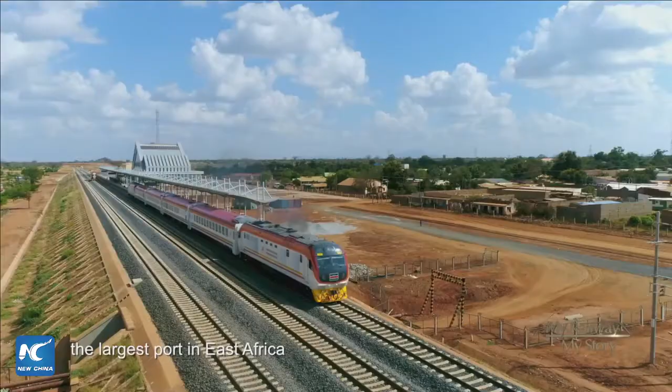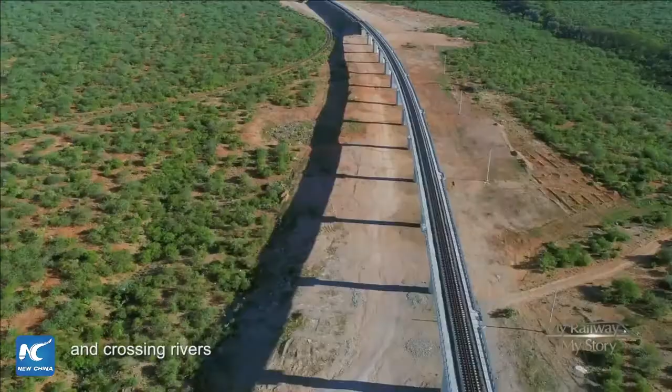This dream has been alive for over 100 years. The challenge of traversing mountain ranges and crossing rivers is above all a dialogue and communion between man and nature. Kenyan and Chinese railway workers tell the story of the Mombasa-Nairobi Railway line together in their own words.

I'm 27 years old. I'm a student at the Technical University of Kenya, studying civil engineering. Esther Wanjiku grew up in Nairobi, and her love for architecture and engineering began in her childhood. She chose engineering as her university major and did quite well.

As graduation draws near, Esther hopes to find a good job. It's very hard to find a job, and I think in our country we have so many graduates, and especially now being a lady, in an industry that is known to be male-dominated, it's not easy.

Esther finds it hard to secure an engineering job since such positions are few and far between in Kenya. The only railway currently in existence was built 100 years ago. The first railway in Kenya was built by the Indians together with the British. That's 100 years ago, and by then Nairobi was just a wetland. Not so many people used to reside here.

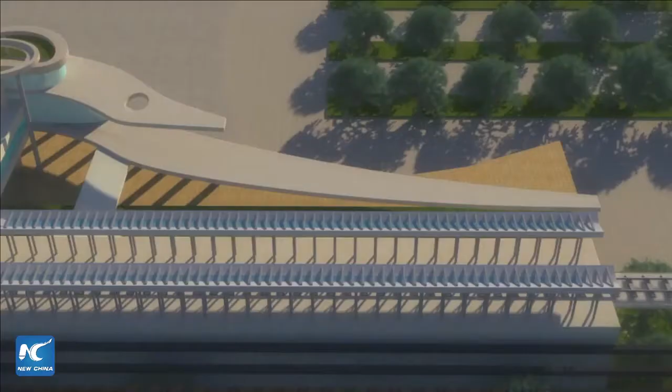In August 2009, Kenya Railways agreed to cooperate with the China Road and Bridge Corporation to construct the Mombasa-Nairobi Standard Gauge Railway. This new line will effectively reduce the travel time between Mombasa and Nairobi from 10 hours to about 4.

Moreover, the railway serves as the first section of the Northern Corridor Railway, upon which the imports and exports from countries like Kenya, Uganda, Rwanda, Burundi, DR Congo and South Sudan will be transported.

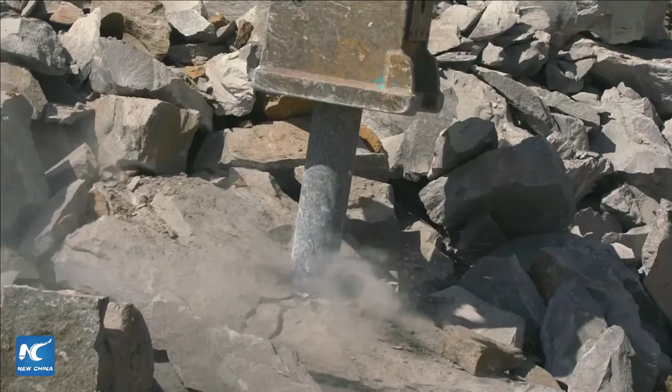In November 2014, the Mombasa-Nairobi Railway project officially broke ground, to take goods and services and passengers between Mombasa and Nairobi.

Everyone was talking about how the government is going to build a new railway that is going to be better and faster than the old railway, that it's going to bring a lot of change and a lot of development to our country and the neighboring countries. I got a job in the Standard Gauge Railway at Section 1 in Mombasa.

I will miss you, but I know you're going to work. All I want is that you keep God first, take care, be a good girl. I'll miss you. Bye, see you.

I know I'm going to miss my family, but I also know that I'm going to make new friends. I am very excited to be part of this great project.

This is Mombasa, the starting point of the railway, and where Esther is going to work. The company has assigned a supervisor for each new site engineer.

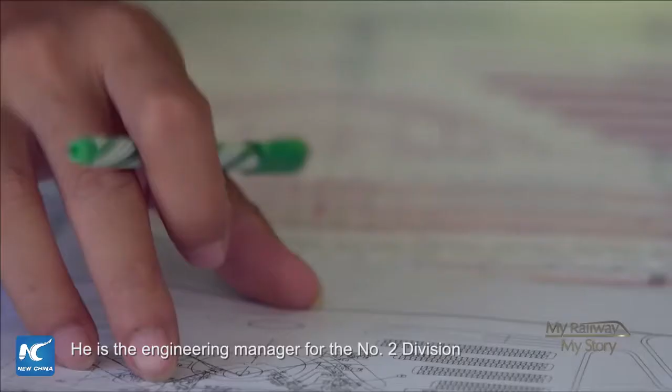31-year-old Ye Chungui comes from Guangxi Autonomous Region in southwest China. He's the engineering manager for the No. 2 Division, Section 1 Project Site Office of the Mombasa-Nairobi Standard Gauge Railway.

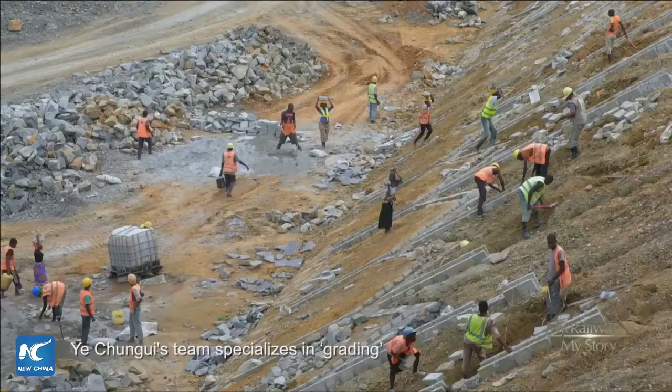Ye Chungui's team specializes in grading, leveling the ground, and within the coming 3 months must unearth and excavate nearly 1.4 million cubic meters of dirt.

Ye Chungui wants to train Esther as a site engineer, in charge of site equipment management, personnel deployment, and construction organization.

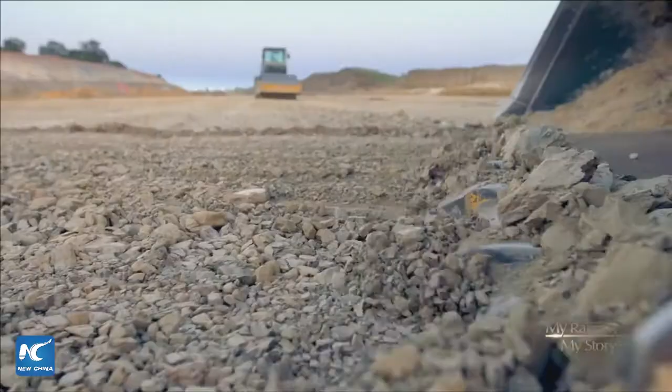I think in the beginning there was a lot of work. First of all, when you get here in the morning, you have to organize the workers, that is the drivers, the labor. You have to organize the machinery, the kind of work they have to do.

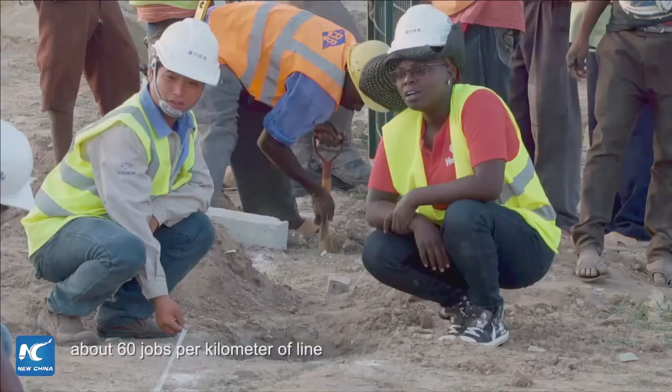Though confronted with many challenges, Esther knows that she's not alone. The Mombasa-Nairobi Standard Gauge Railway has created an average of about 60 jobs per kilometre of line. More than 30,000 Kenyans now work side by side with their Chinese counterparts, accounting for 90% of the total railway workforce.

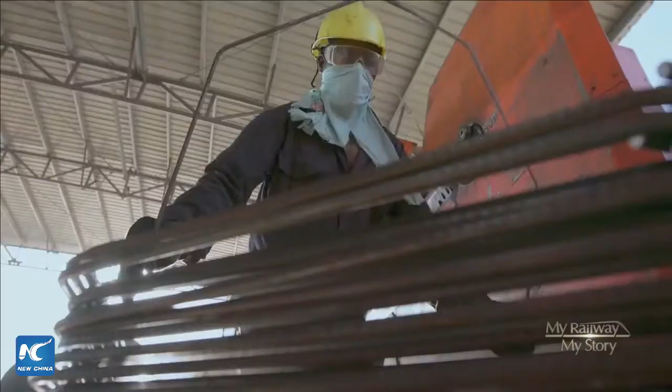Esther believes that if others can do a good job, then so can she. I think for me, I've been able to discover a lot about myself. I've discovered some ability that before I didn't know I had.

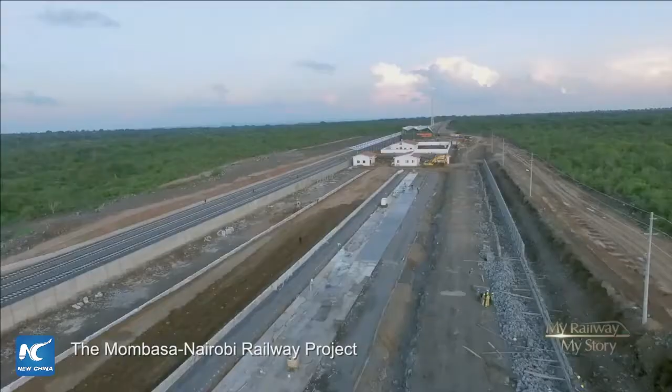The Mombasa-Nairobi Railway project is divided into 11 sections. Each has its own regional project site office, responsible for construction in that specific sector.

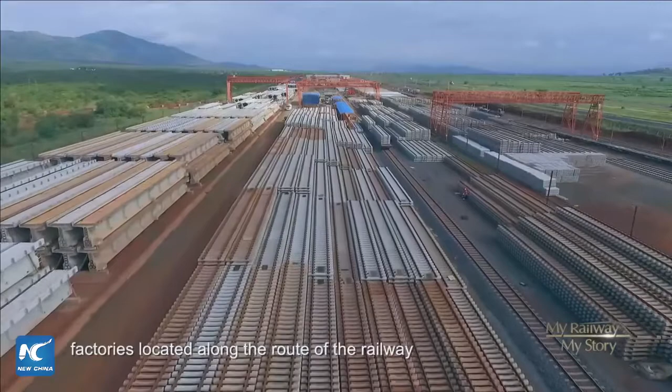While Esther and Ye Chungui's team are busy with ground levelling, factories located along the route of the railway begin making the parts required to build the line.

Rail ties are used for support and load transmission. Manufacturing ties is a complicated task, involving 18 steps which include steel reinforcement, concrete pouring and curing.

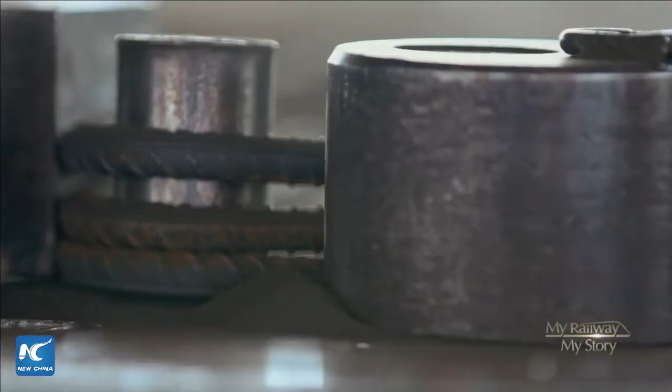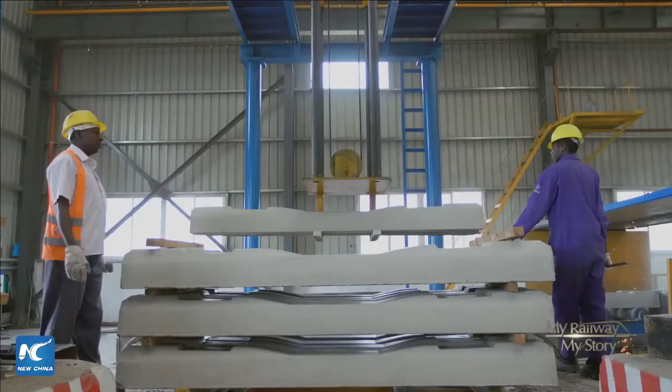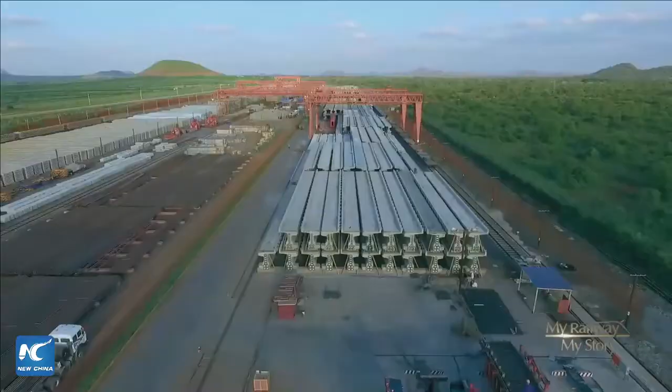As many as 1,400 rail ties can be manufactured each day, while only 2 T-beams, weighing 143 tons each, can be fabricated.

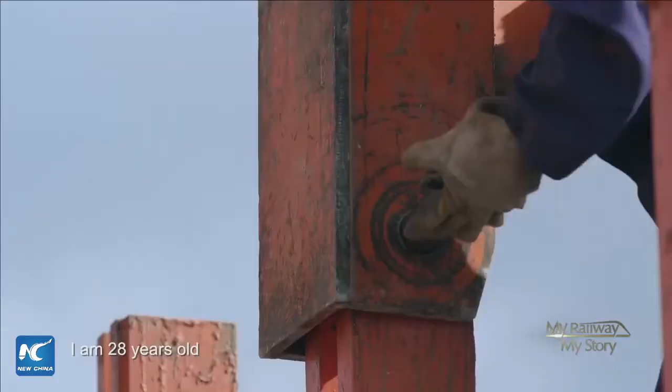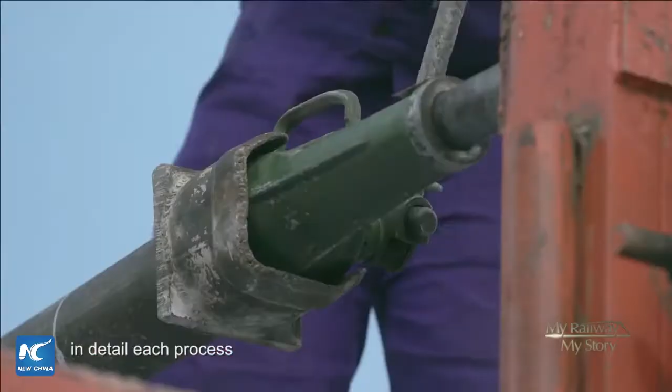My name is Nicholas. I'm 28 years old, from Nairobi, now working with the SGR as an interpreter. Nicholas helps Chinese engineers translate technical terms and explains to the Kenyan workers in detail each process. I have to understand the misunderstandings between the Chinese people and the local people that can arise when translating. That is the biggest challenge.

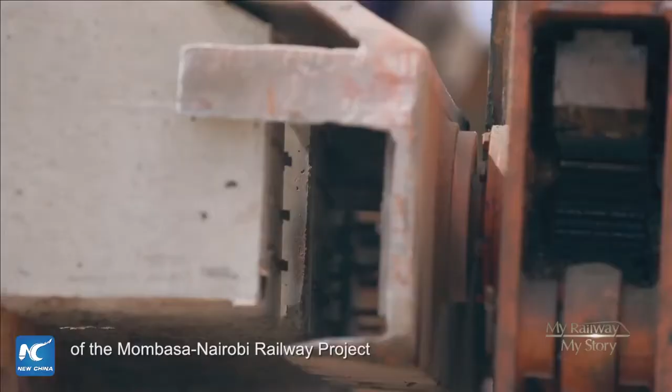In October of 2015, the track laying and beam erection work of the Mombasa-Nairobi Railway project commenced. The T-beams and rail ties are delivered to where they're needed. To speed things up, Chinese workers built a 10-kilometre supply line.

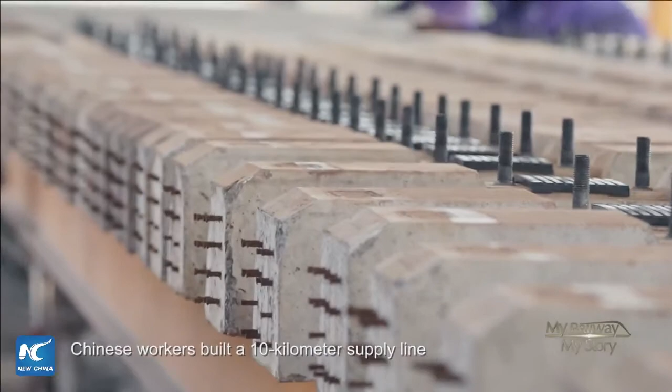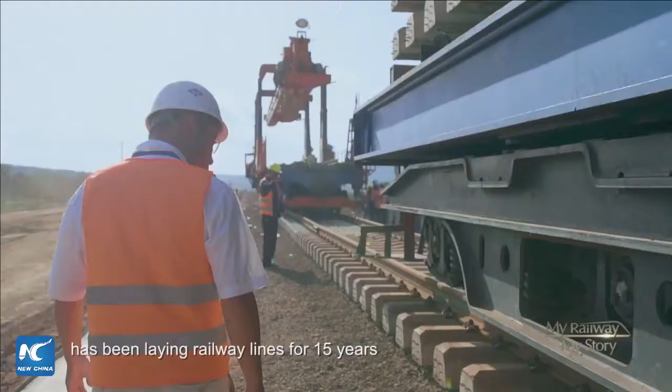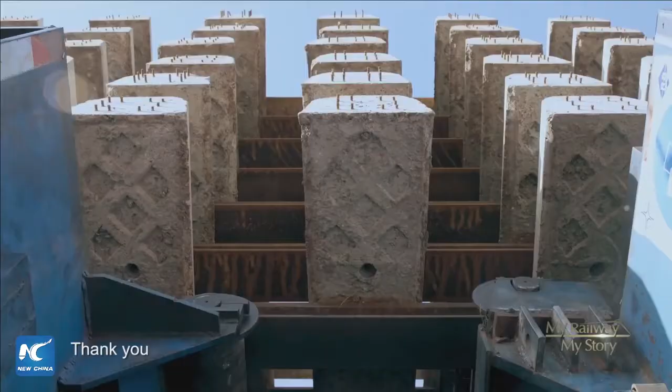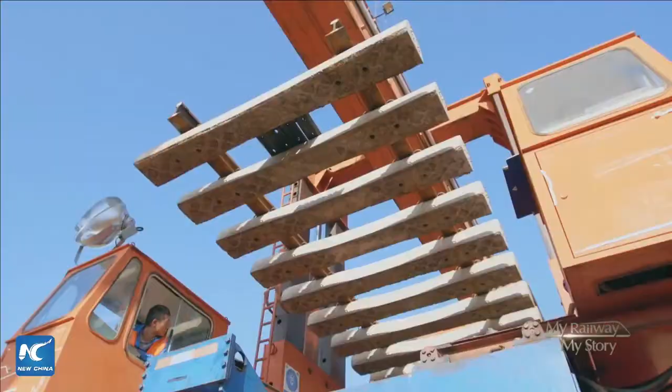Wang Yuanheng from Shandong province in East China has been laying railway lines for 15 years. He's now the deputy director of the 7th project management team and is responsible for track laying and erecting beams. One section of track is composed of 44 rail ties, spanning 25 meters and weighing 15 tons. It takes only 4 minutes to lay a track panel, with a margin of error less than 2 centimeters.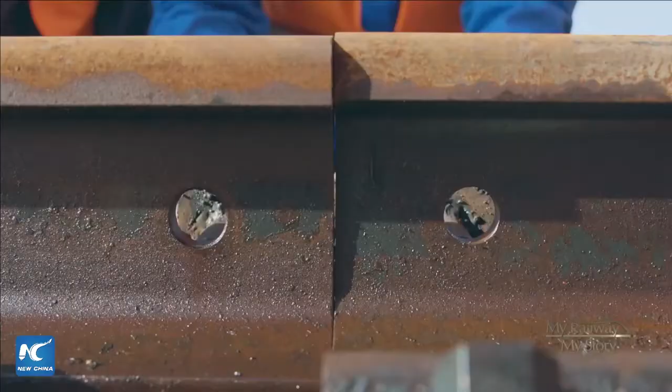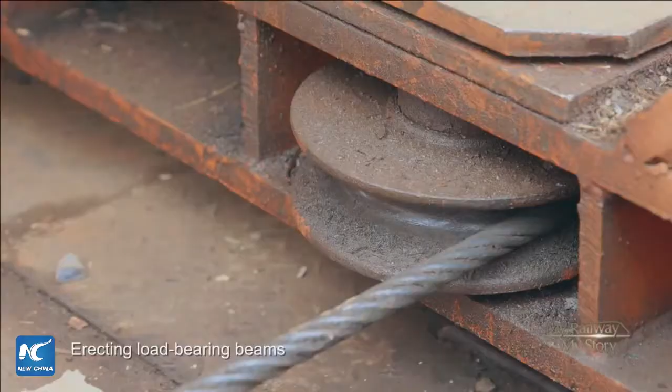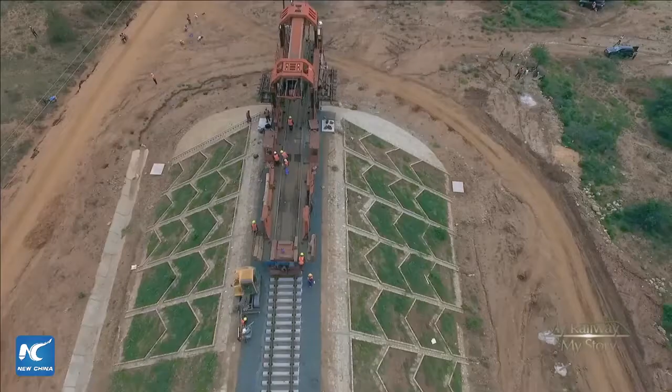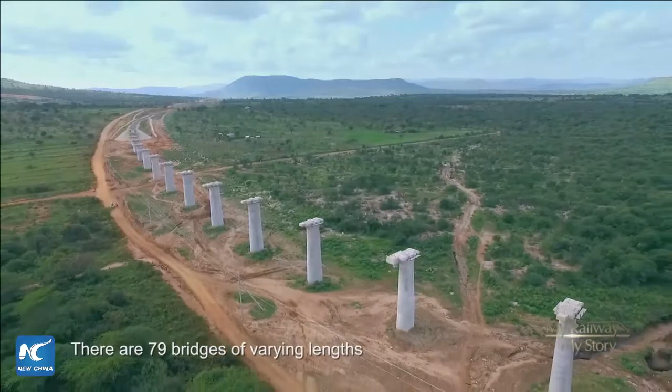Erecting load-bearing beams, also known as T-beams, is far more demanding than laying sections of track, since the workspace is restricted and the weight in lifting is uneven. Wang Yuanheng's team is erecting beams for the 807.46 meter long Orma-Gerigara Bridge. There are 79 bridges of varying lengths along the Mombasa-Nairobi Standard Gauge Railway, and Wang Yuanheng's office will work on half of them.

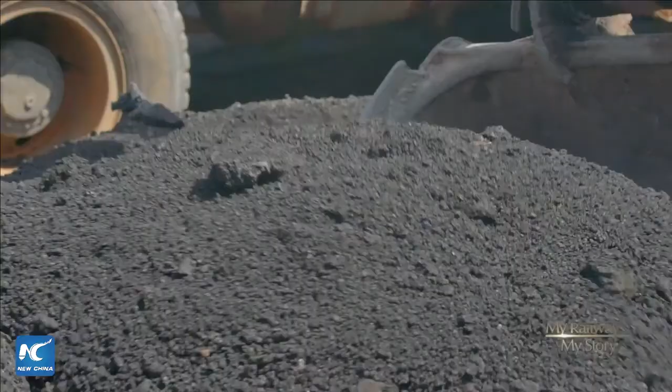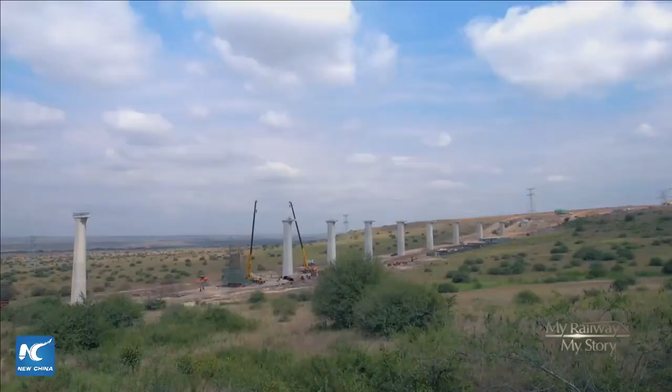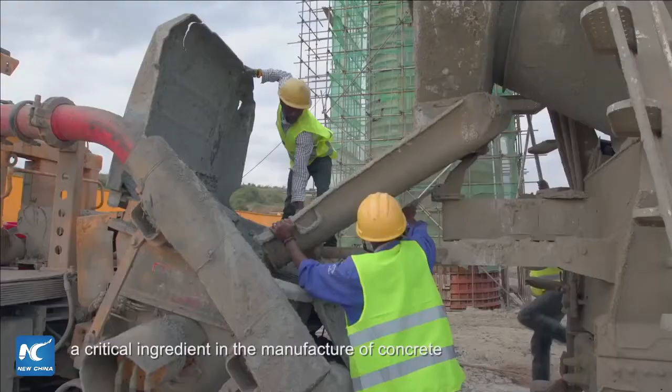Excavates natural volcanic ash to replace the coal ash used in the mix of high-performance concrete. Shortly after construction began, demand for concrete rapidly began to outstrip supply. The situation was exacerbated further still by Kenya's dependence on the import of fly ash, a critical ingredient in the manufacture of concrete. In response, specialists from the China Academy of Construction Research proposed a bold countermeasure: the replacement of fly ash with volcanic ash.

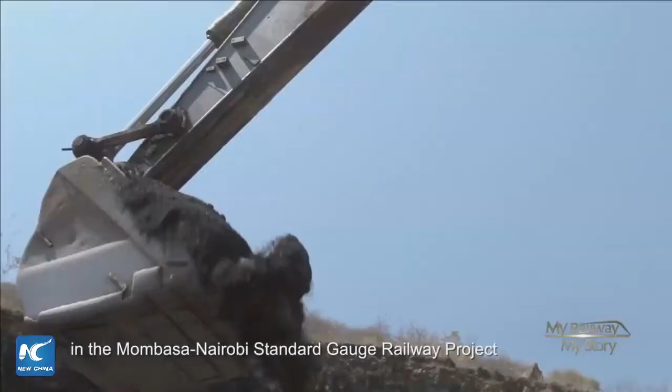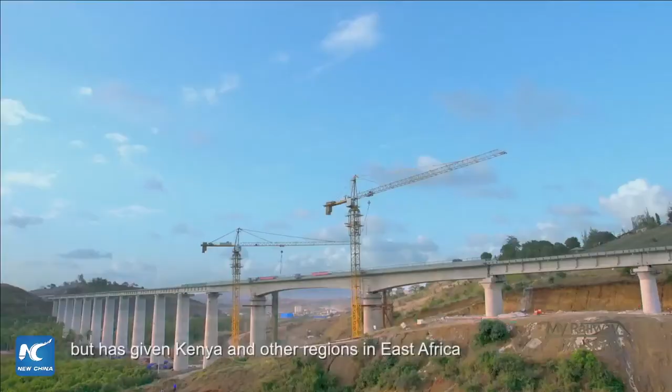It does perform, and the tests have shown that it is giving good results, as good as when you use fly ash. The research led to wide application of volcanic ash in the Mombasa-Nairobi Standard Gauge Railway project. It not only solved a pressing problem, but has given Kenya and other regions in East Africa a very viable solution in future highway and bridge construction.

As planned, the Mombasa-Nairobi Standard Gauge Railway will pass through Tsavo National Park, the largest wildlife reserve in Kenya. The park covers more than 13,000 square kilometers and, at its widest point, is 240 kilometers.

My name is Benson Okita. I'm head of monitoring at Save the Elephants. So Charles, we're going to look for elephants in Tsavo generally, and in this ecosystem we have about 13 to 14,000 elephants, at least from the last census that was done in 2014. There are 2 there again. Dr. Okita is tracking elephants in Tsavo East National Park.

Soon after the Mombasa-Nairobi Railway project began, concerns were raised by conservationists, fearing that the railway passing through the park would adversely affect local wildlife. Dr. Okita's worries are shared by the Chinese railway designers.

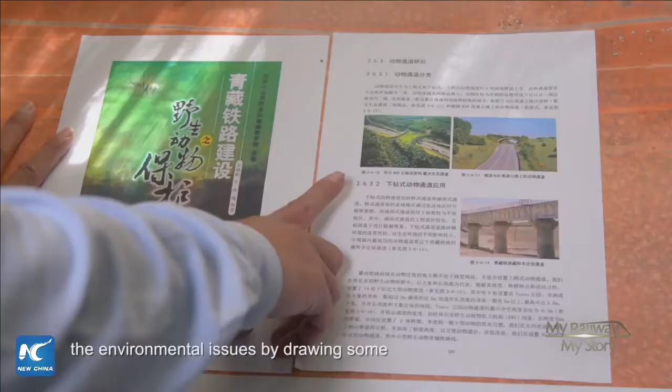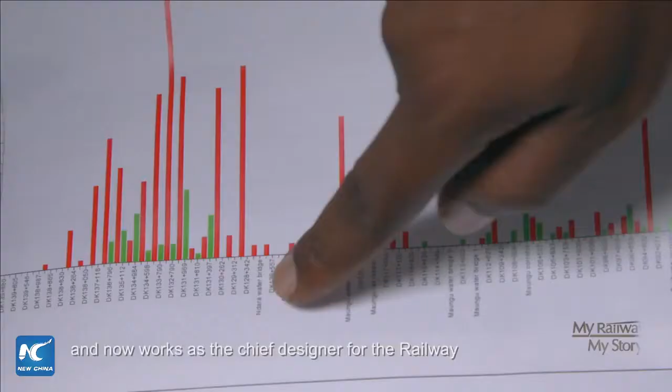Zhang Jingqiao from Shandong Province has been engaged in railway survey and design for nearly 20 years and now works as the chief designer for the railway. During his career, he has witnessed 6 China Railway speed-up campaigns. Zhang Jingqiao recalled the Qinghai-Tibet Railway, where Chinese railway builders designed and built 33 wildlife passages along the line. Tracking indicates that over 10 years, the use of these passages by animals such as the Tibetan antelope has risen considerably.

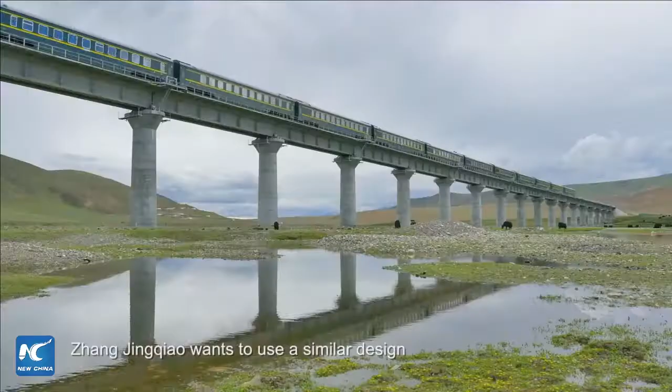Zhang Jingqiao wants to use a similar design for the railway in Kenya.

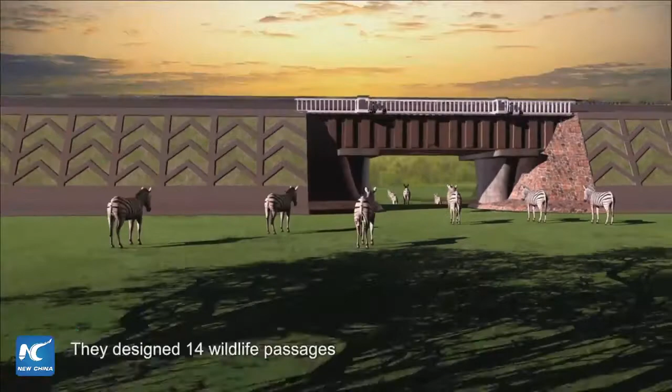Zhang Jingqiao and his team decided to follow the existing transportation corridor when designing the Mombasa-Nairobi Standard Gauge Railway. They designed 14 wildlife passages by erecting bridges or constructing culverts.

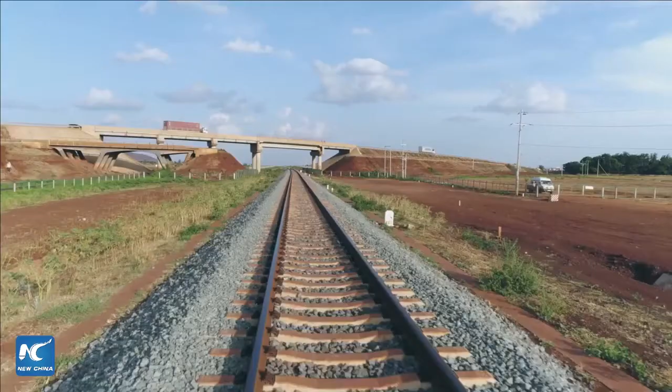Dr. Okita has dedicated years to wildlife conservation and knows that many environmental programs end up failing. In his opinion, greater study is needed to see how the Qinghai-Tibet Railway conservation plan can be applied in a Kenyan reality. In May 2016, the initial phase of track laying for the Mombasa-Nairobi Standard Gauge Railway was completed.

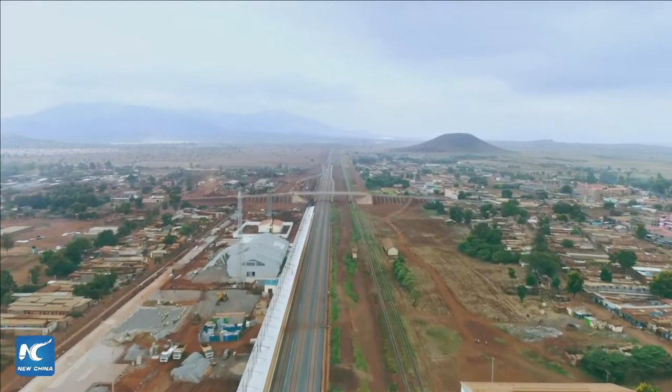A 3-kilometer stretch of railway cut through the town of Emali, causing inconvenience for the town's 25,000 residents.

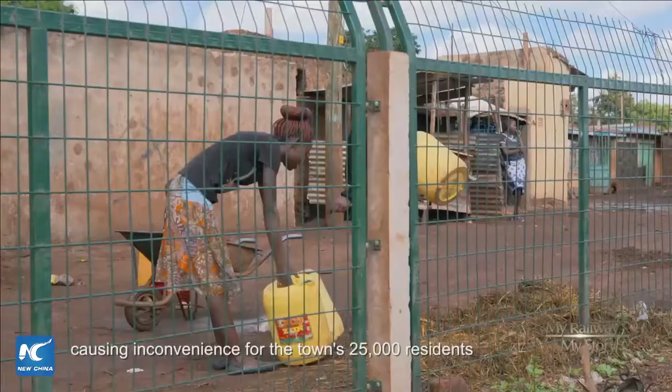I want you to factor in terms of livestock. We have livestock, and that bridge will be used by vehicles, and also by our livestock. The population on the Maasai side is very high now, since people have shifted from other areas to the Maasai side because they will be connected. So we thought it safer for the children to use a footbridge rather than share one bridge with vehicles.

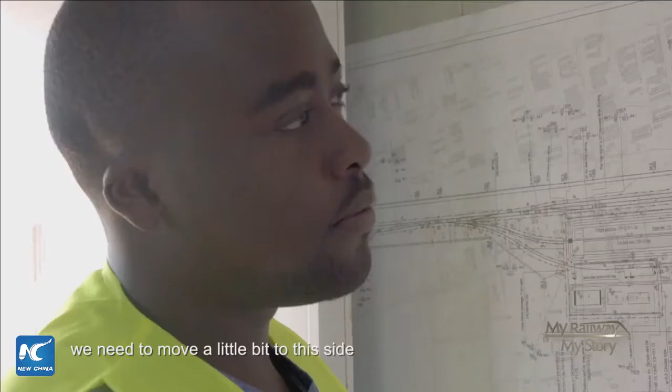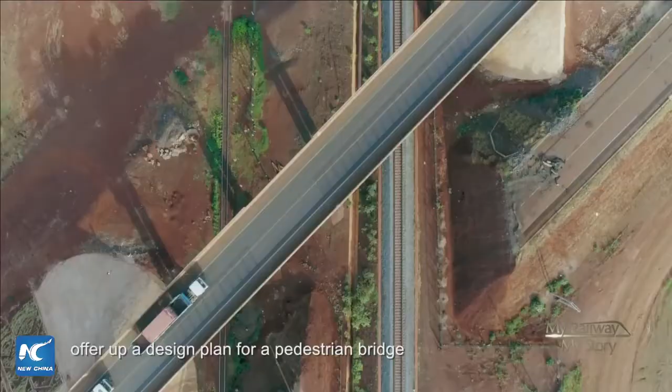The Chinese builders are keen to avoid creating any inconvenience for local residents. Within a month, Xiao Xiang's team offered up a design plan for a pedestrian bridge, even though construction of this section had already concluded.

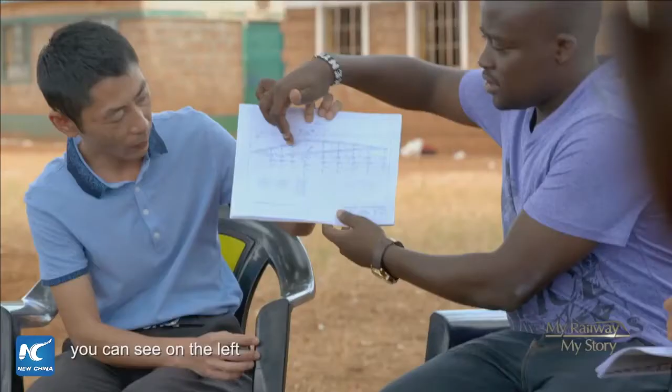From this map, you can see on the left it has a stair-like look, so that's where pedestrians will be walking. On the right, it's smoother and straighter, for things like motorbikes or bicycles, so there's a difference between people and vehicles, just to avoid any accidents.

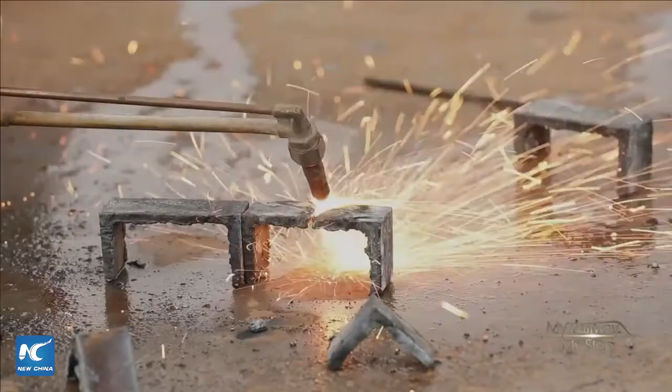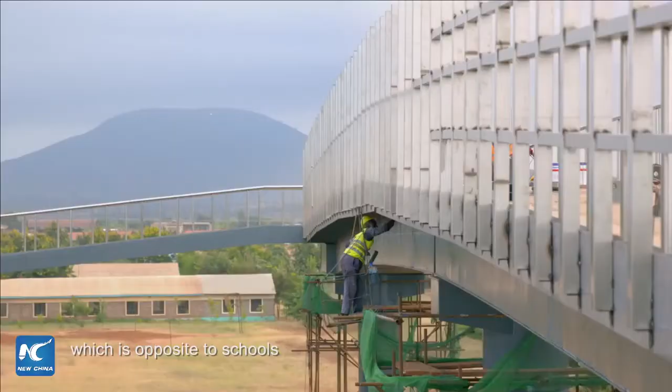In December of 2016, the railway company began construction of the pedestrian bridge in Emali. The newly designed bridge, opposite to schools, has cut 3 kilometers off students' daily commutes.

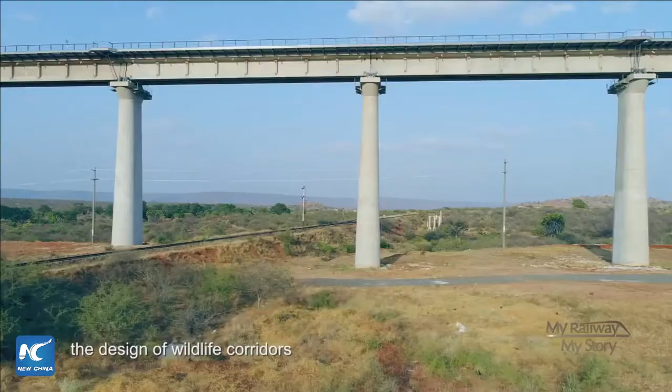18 months after work on the railway began, the design of wildlife corridors by Zhang Jingqiao's team has become reality.

So other wildlife can now use this culvert as an underpass from Tsavo West into Tsavo East. Dr. Okita, along with independent conservation groups, have discovered traces of wildlife on both sides of the corridors.

Because I travel on it many times a week, I've seen elephant footprints come right up to it, on both sides. Even now, if you cross to the other side of the railway, you'll see fresh elephant footprints from last night. They're there now, where I turned around, and they crossed. They use it. I don't know if they've actually crossed, but they've come to have a look. They back off, but for sure they will use it.

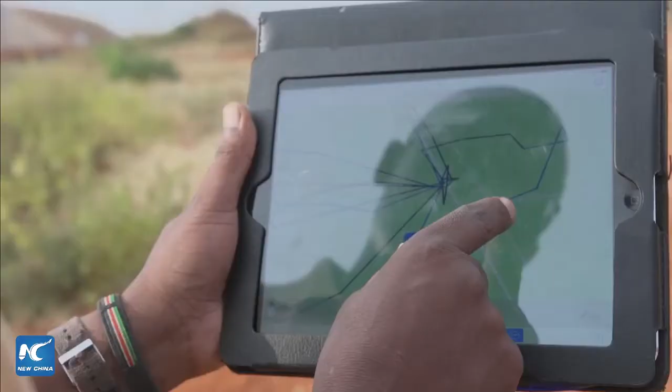It takes time for wildlife to get used to any new structures built in their ecosystem. Elephants are brave enough, and it won't take them a lot of time, but other species could be very shy.

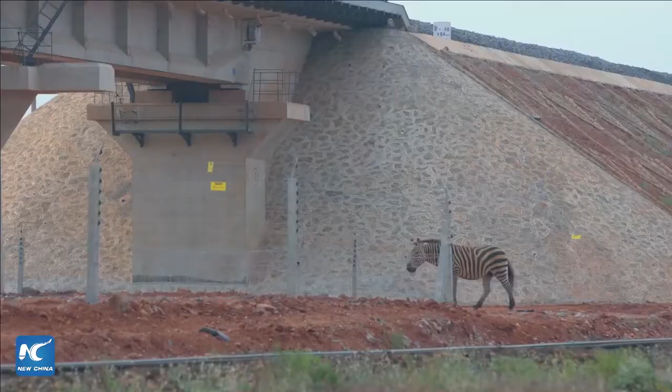Dr. Okita continues his research along the Mombasa-Nairobi Railway line.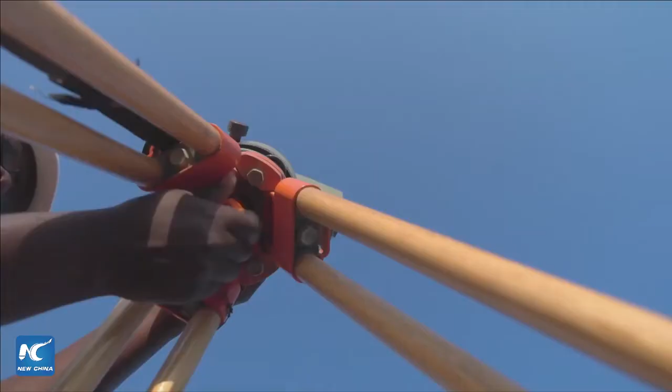In August 2016, Esther and Yechun Gui managed to complete 1.4 million cubic meters of backfilling work. Esther has blossomed into an outstanding site engineer.

2 years ago, where we're standing was a valley, but it has undergone a lot of changes, and now it's ready to receive the railway. My life also has undergone a lot of changes.

If this project goes on from where it is right now, I can bring my friends, we can work together here so that they can feel the same thing I'm feeling over here.

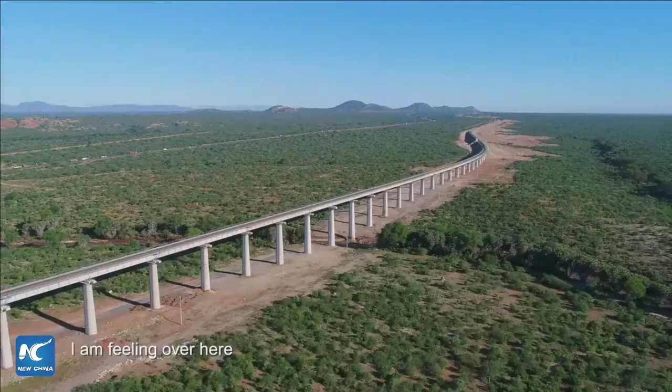Along the Mombasa-Nairobi Standard Gauge Railway, there are 79 bridges of varying height.

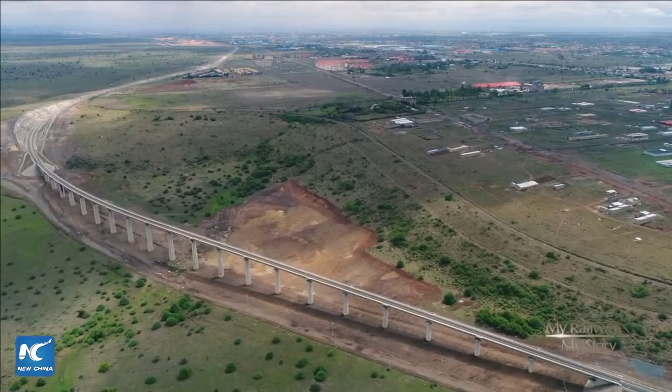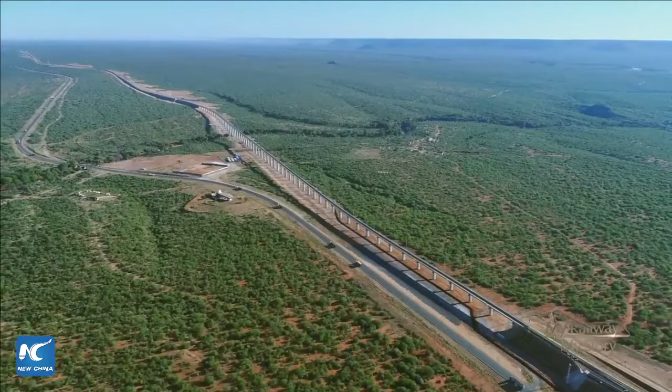The bridge builders not only surmount obstacles, but protect ecosystems and connect souls. The deep friendship between China and Kenya continues to flourish to this very day. Thanks in part to the Mombasa-Nairobi Railway, communication between the two nations has gotten even closer.

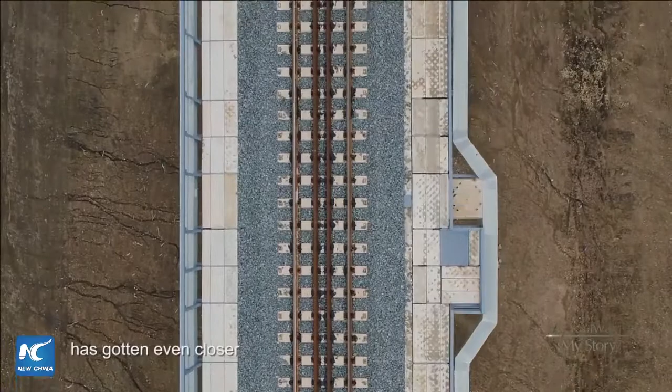With the Chinese experience, they've built the Tibetan Railway, they've built long railway lines passing through the parks, and when they build this, they take into consideration the needs for preserving the environment. That experience is important in the African context. I think most of the challenges we're able to overcome.

If you're determined to get something, you will get something. Nature has a way of opening doors for people who are really determined in life. This can make me tell my children, when I give birth one day, about me working with the Standard Gauge Railway, what I used to do here, and they'll be happy their mom once did something nice in Kenya.

The meaning of the bridge is basically linking this group of people to the other group of people. As I understand the Chinese, and they understand my countrymen, then I connect in terms of language and in terms of way of thinking.